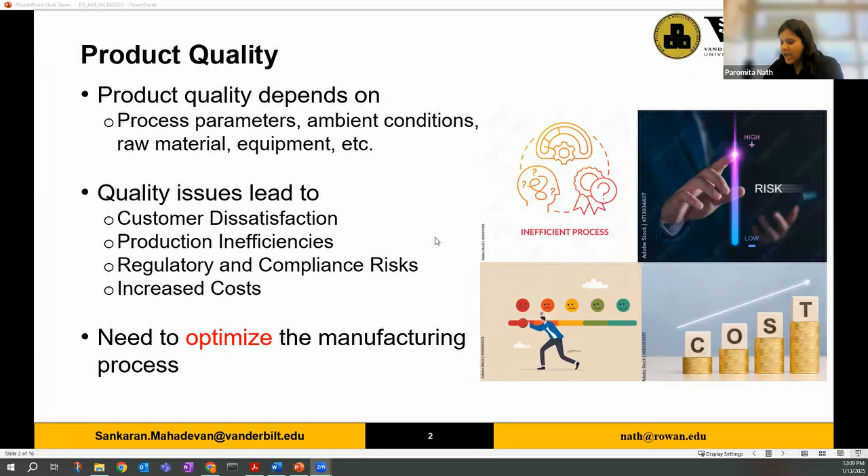Now, how do we do that? If we want to have a product of consistent quality, how do we do that? We have to optimize the manufacturing process.

Now, over the years, this optimization technique has changed. Initially, people would do a design of experiments and then conduct physical experiments, which was basically a trial and error process - let me try these manufacturing parameters, does it help, and does it improve my product quality? As you would imagine, if you're doing this repeated manufacturing physically, you're going to waste a lot of raw materials and energy.

So then there was a shift towards model-based engineering. In model-based engineering, people now create a physics-based model approach. And with that, instead of doing the trial and error in a lab or in a manufacturing process physically, you are doing that with the physics-based models.

Now, no model is perfect. There are a lot of assumptions, and then there are simplifications when we are trying to solve those partial differential equations. So these may be inaccurate, and there tends to be a lot of inaccuracy related to that.

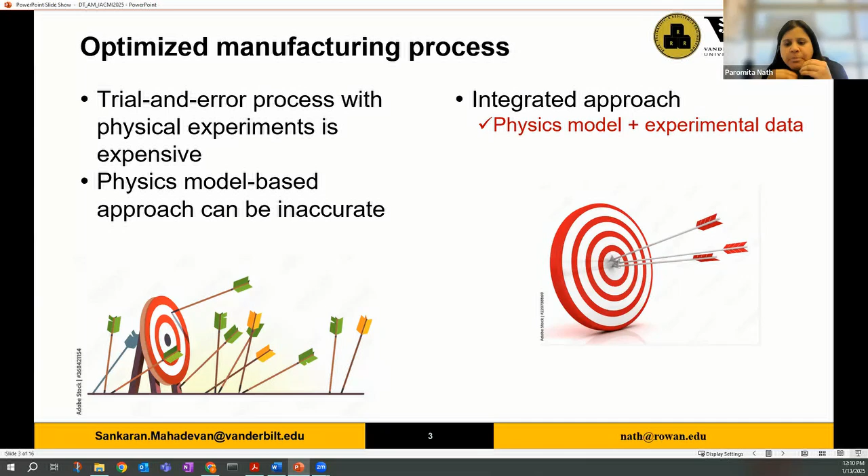So then there was a lot of work on this integrated approach of using physical models in conjunction with a few experimental data. The idea being the physics model's prediction can now be corrected by using some experimental data. And now we can use this corrected physics model to optimize the manufacturing process, which leads to a more efficient overall approach.

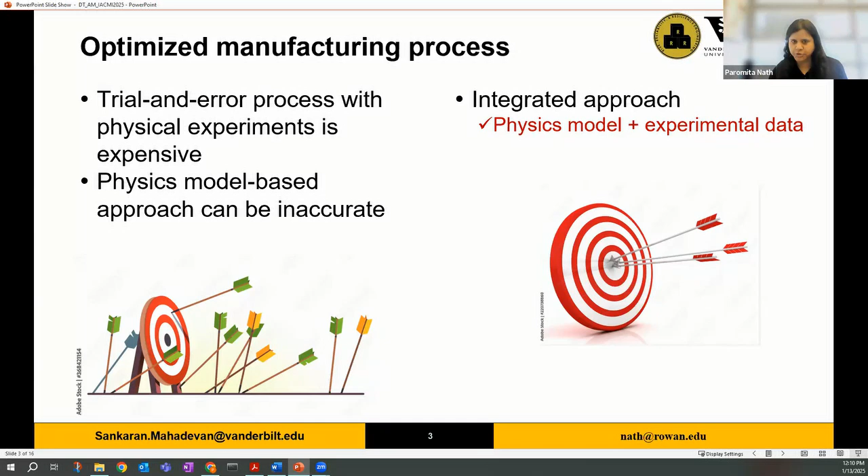Now, what happens when we have a manufacturing process? There is a lot of variability which is inherent to the system. Let's say you get some powder as the raw material for an additive manufacturing process. The powder quality is not going to be consistent. It varies across different manufacturers. It might also be different for the same manufacturer. We need to be able to take that into account. Otherwise, we will end up with products which have variable quality.

Now, we talked about the model-based approach. The moment we add a model into the mix of our optimization process, we are adding more sources of uncertainty. And these sources of uncertainty are different from the ones we have because of inherent variability. This is coming from our lack of knowledge about the model in general, and these are called epistemic uncertainty. That could come from differences in the model parameters - we may not know the exact value, we may not have the exactly correct model itself, there may be uncertainty in the input to the models and so on.

Some people think, well, models have so many issues, I'll just go with experiments, but that also does not work very well. There are errors in the experiment due to human error, there could be equipment error and so on. So basically, we cannot get rid of these uncertainties. What we do have to do, though, is identify these uncertainties, reduce them, and so on.

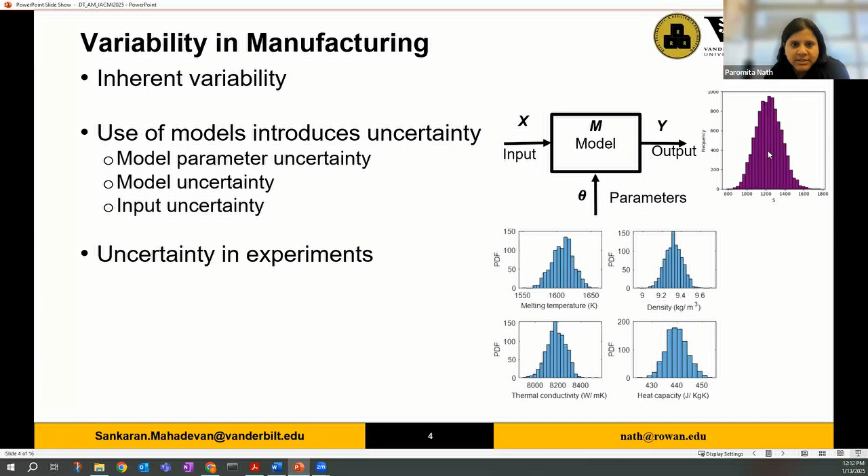So if we look at a model as such, it has some input, it has some parameters. Now, if there is uncertainty in the input and the parameters, your output is going to be uncertain. Now, if the output is going to be uncertain, we need to now account for this variability and uncertainty. So there are two things that we do.

One is the forward propagation, where we first identify where this uncertainty is even coming from, which parameters are leading to more uncertainty. So we do sensitivity analysis and stuff like that. And then we focus on reducing the uncertainty.

Can I collect some more data and reduce the uncertainty in my model prediction? Can I characterize this using better experiments? Can I calibrate and validate my models?

Now, you can do so far with the quantification and reduction of uncertainty, and then we are left with some uncertainty that needs to be managed, and that is where process optimization and process control under uncertainty comes into the picture. Now, when we do process optimization, I would like you to understand the differences between process optimization and process control. In process optimization, we use the information about the manufacturing process before the process has started.

So we take the information that we have earlier and we do the process optimization. Our objective function for this optimization formulation is going to be, we want to have the best quality, we want to minimize cost, we want to minimize time, and so on. But this information is based on things that have been happening before our manufacturing started.

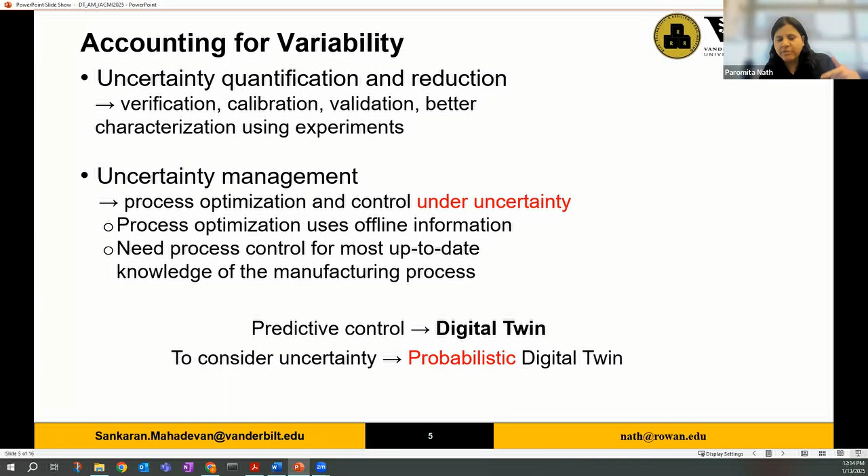So our work is on probabilistic digital twin, which means there is a flavor of uncertainty quantification and management on the digital twin itself. Now, what is a digital twin? There have been many, many definitions of digital twin, and this paper by VanderHorn and Mahadevan does look at all the different definitions. Now, the idea of digital twin was started by Michael Grieves, and that was way back.

And his idea came from life cycle product management. And the definition that is a robust definition for digital twin is that it is for a single instance of the physical system. The data collected from this single instance is used to update the virtual representation. And over time, the digital twin represents this single instance with increasing fidelity.

Now, this is an important thing to note because in the literature and even in the industry, digital twin is very often confused with simulation model. And there is a recent article by Grieves himself saying don't confuse digital twins and simulations.

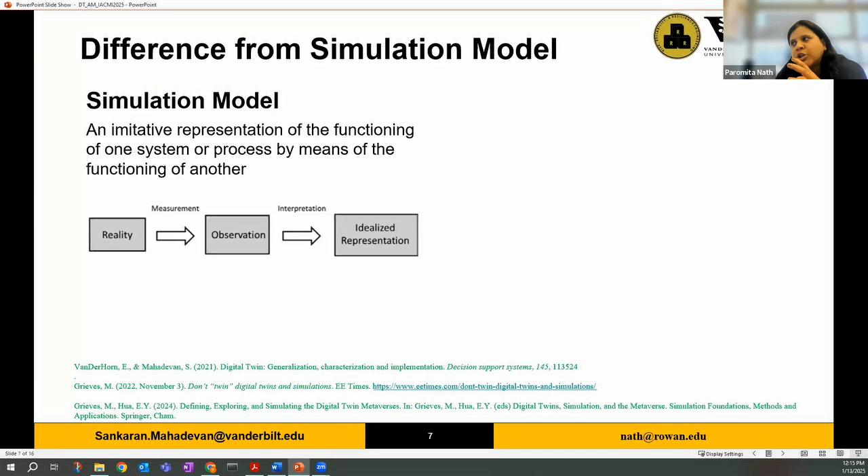The simulation model is basically a representation, an imitation of the physical system itself. However, a digital twin has more elements to it that we would look at in the later slides. So the digital twin is a virtual representation of the physical system. However, this virtual representation is updated throughout the process by this exchange of information between the physical and the virtual representation.

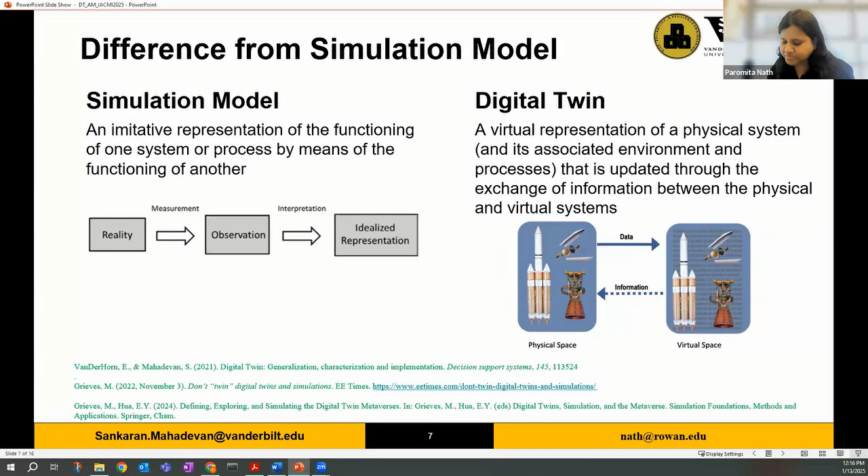Now, if we look at the elements of the digital twin, there are three basic elements, and there is a lot of nomenclature related to that. This is the nomenclature that I'm going to use for the rest of our presentation.

So a digital twin has the physical system that you're making a twin of. So this is the actual or the intended physical element, and this resides in the physical world. So this could be your CNC machine and the whole setup related to that. When you make a physics-based model or an analytical model of this physical system, that is the virtual representation of the digital world.

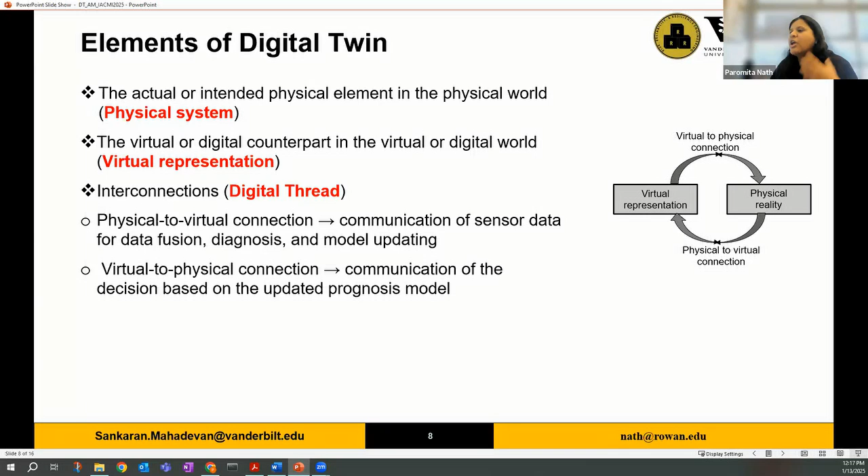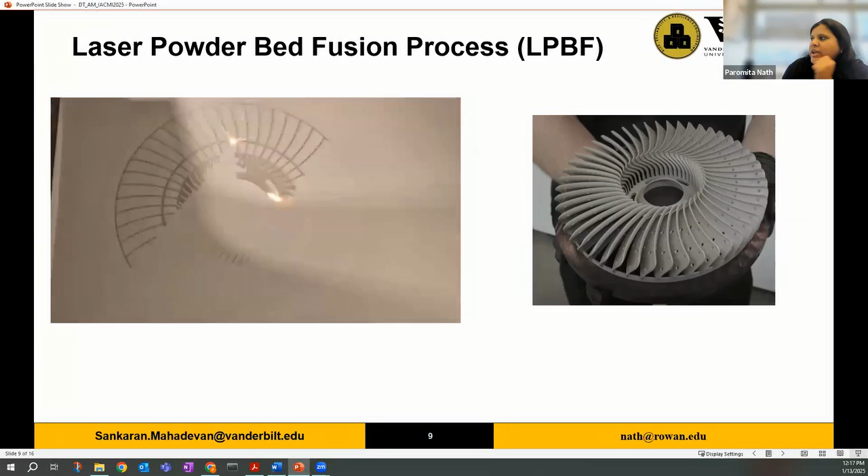Now, if you look at a laser powder bed fusion process, which is here, this laser goes over the powder material layer upon layer till we get this final product. Now, if we have this product, how would we make a digital twin for this LPBF system?

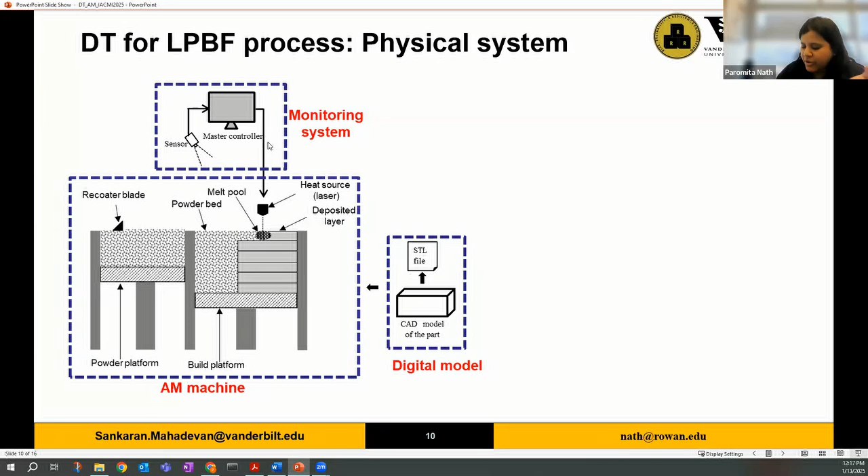We'll start with this, with this physical system, which consists of the machine itself. In 3D printing, we need a digital model, which is a CAD model that goes on. We have a monitoring system as well. For a digital twin, the monitoring system has to be online, non-destructive, and non-contact. So those are the requirements. Then we have the digital twin's virtual representation, which is basically the physics-based models.

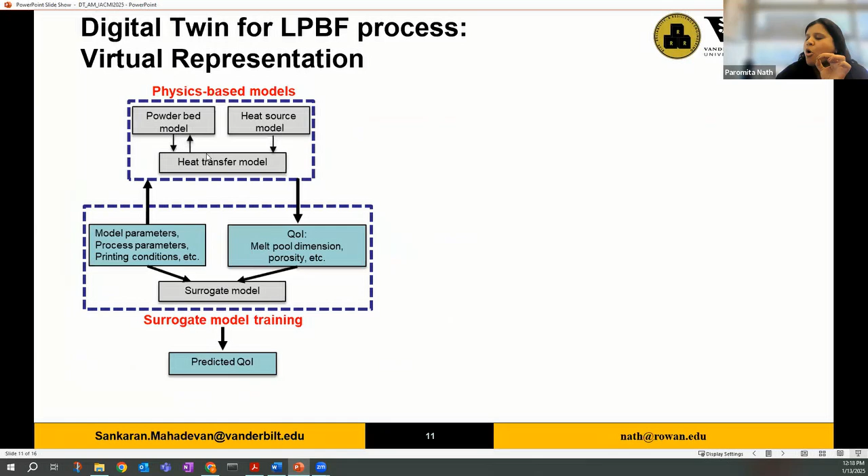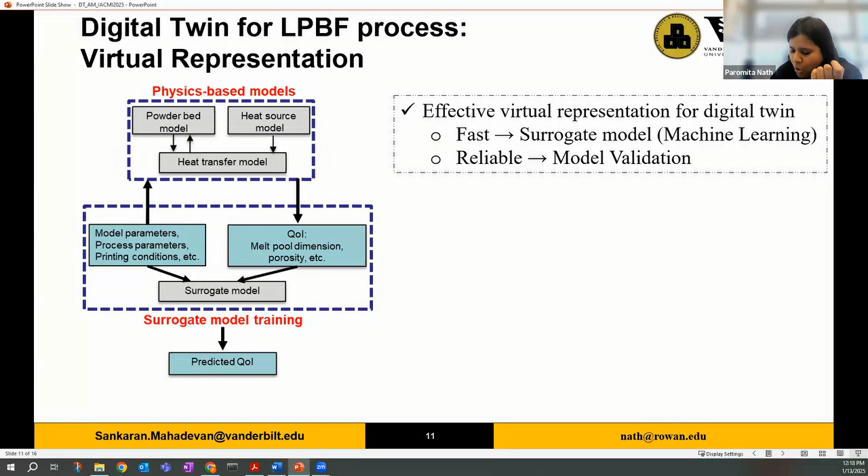Now, the physics-based models sometimes take days to run. So to make it more fast, we have to have a surrogate model. Most of the time, these are machine learning-based models. Then we also want to have a reliable model.

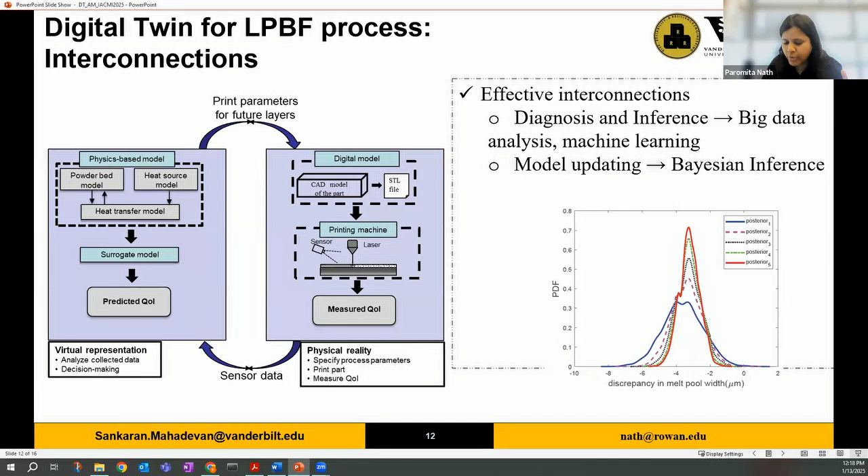Now let's say we want to do decision-making and process control with respect to porosity in 3D printed parts. The idea here is that we use the digital twin to predict what is going to be the quality of the finished part.

If the quality of the finished part is very similar to our target, we then continue the process as it is. If it is very, very poor, then we know that nothing we do is going to change much about this product, and the target quality is too much higher, then we can terminate the process and save on material.

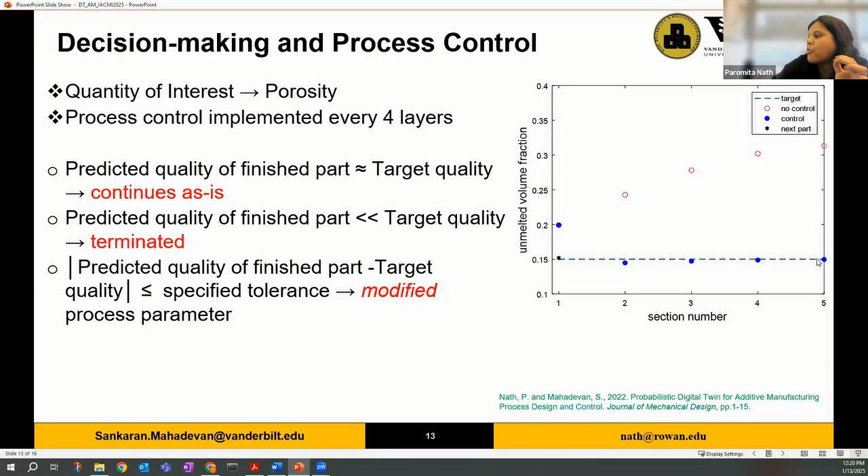So this is an example from one of our works where we see that if we do not control the product quality by changing the process parameters, the porosity tends to keep increasing, leading to a part that is not of good compliance. Whereas if we keep changing the manufacturing process, then our product quality is within the limit or within the target that we had.

So this was all about the LPBF process, which is for additive manufacturing with metal. Now, we have been recently working towards the digital twin for composites in the additive manufacturing system as well, where we have a 3D printer with composites.

Now, what we are doing is we are looking at the process structure property relationship that we would then validate with experiments. Once you have this model set up for a composite, where you know what should be the parameters depending on what is the quantity or what is the volume of your carbon fibers in the material.

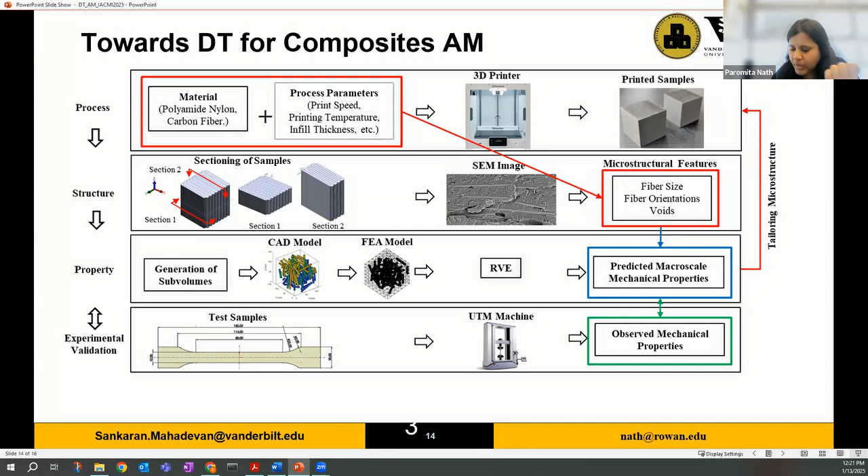How do you then predict the macro scale properties using a simulation model here, for a finite element model, for instance? And then how can we now tailor the microstructure so that we get composites that have the quality of product that we really need? Okay, so this would be, in short, an introduction to how digital twin works.

And I'll bring it back to Dr. Mahadevan for his concluding remarks.

Thank you, Paromita. So as I mentioned in the beginning, we are now taking these concepts that we developed with NIST funding and Paromita's PhD now to NASA STRI project that started last year. This is funded, it's a $15 million project over 5 years.

and certification of additively manufactured metal components. That is actually, as Paromita mentioned in the beginning, because of all the variability, there is tremendous challenge in qualifying and certifying additively manufactured products.

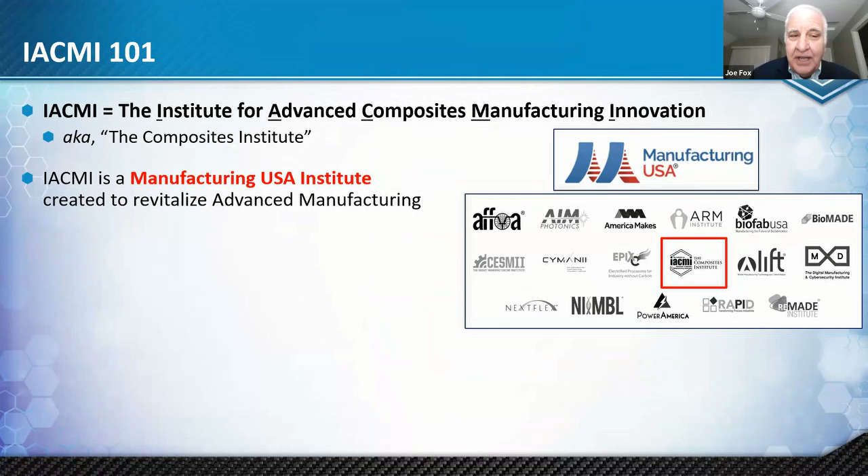I think most of the people in the audience are familiar with IACMI, but there may be a few newcomers, so here's some IACMI 101. IACMI stands for the Institute for Advanced Composites Manufacturing Innovation, also known as the Composites Institute. It is a Manufacturing USA Institute, one of 18 that have been created to revitalize U.S. manufacturing. It is a public-private partnership that brings together industry, academia, and the government.

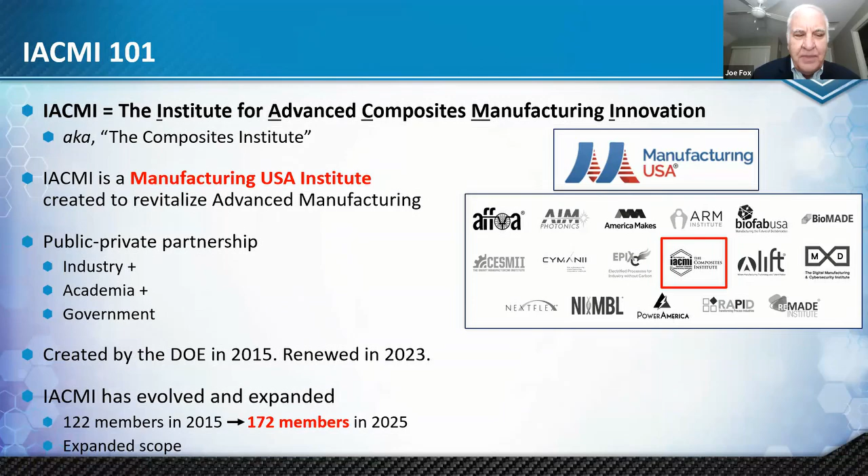It was created in 2015 and then renewed in 2023. The press release in 2015 said that IACMI had 122 members when it was created. That number today is 172 members, so IACMI's membership has increased by 40% in the past decade. Its scope has also expanded, and I'll talk more about that as I proceed through my talk.

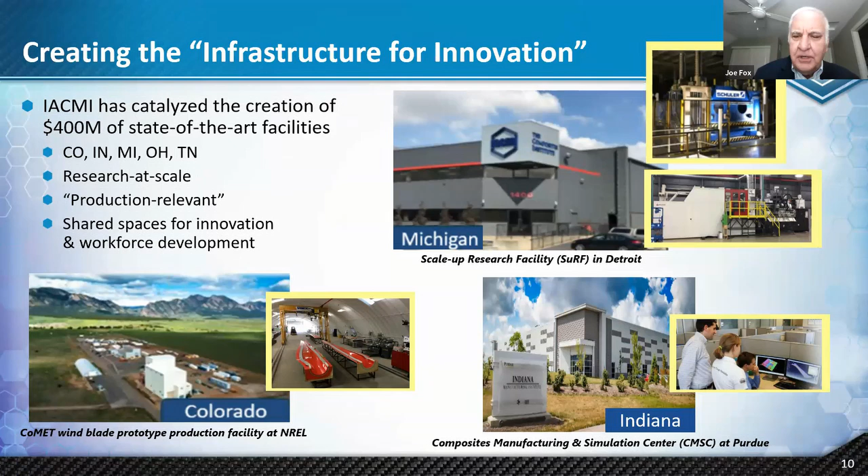IACMI has catalyzed the completion of more than 60 R&D projects with a research portfolio valued at more than $150 million. Those projects have involved more than 90 IACMI members, and there are currently 5 R&D projects underway. These projects have been industry-led, and as Dale and former CEO John Hopkins would like to say, purpose-driven. Those are 2 very important attributes of IACMI projects.

They have addressed key techno-economic challenges to the increased adoption of composites, and they have delivered supply chain-based solutions. You can find the project reports, the final reports for these projects, on the IACMI website. These projects have resulted in dozens of publications and articles.

Now I want to tell you about 4 technical innovation success stories: for additive manufacturing, for the production of composite parts for vehicles, for the manufacturing of wind turbine blades, and for the recycling and reuse of composites. Success story number 1 has to do with additive manufacturing of composites and tooling.

This is a great success story involving innovation and collaboration at Oak Ridge and Purdue that spans nearly the entire decade. It began with a project at Oak Ridge that used the Big Area Additive Manufacturing Equipment, or BAAM, at the manufacturing demonstration facility at Oak Ridge. That equipment enables the production of very large 3D printed structures, like this car that Chad Duty is sitting in.

About 10 years ago, Professor Byron Pipes and his graduate student, Eduardo Barocio, saw what was happening at Oak Ridge, and they said, this is the future. So they began a project to model the additive manufacturing process, and they acquired their own large-scale additive manufacturing equipment to validate their models.

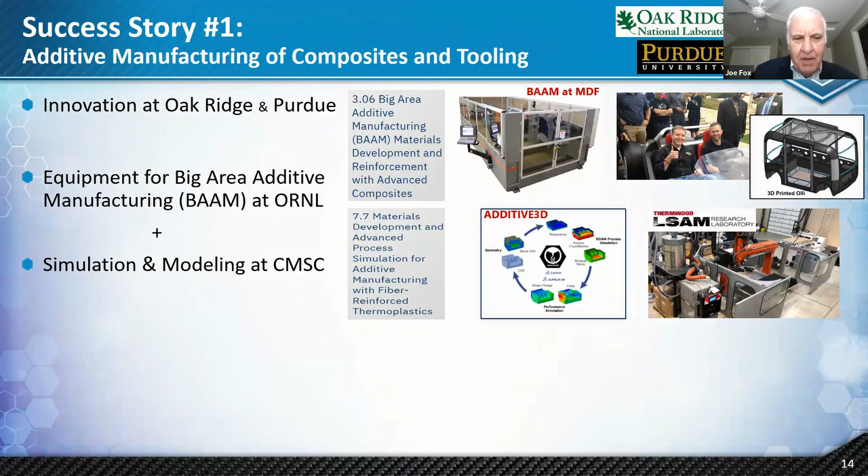Fast forward to 2022, when Dimensional Innovations worked with a team of IACMI members to create the world's largest 3D printed structure: the Al Davis Memorial Torch at Allegiant Stadium in Las Vegas. The team consisted of Techmer, a material supplier, Thermwood, an equipment supplier, and Purdue, which helped with the structural engineering analysis. This is a very good example of a supply chain-based solution, and IACMI catalyzed this collaboration.

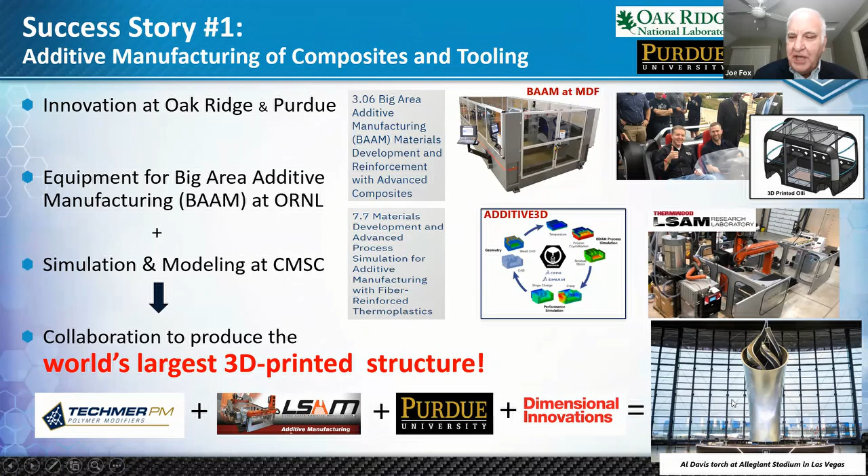You can see the fruits of that collaboration the next time you watch a Las Vegas Raiders football game on TV. Let's talk a little bit more about what is happening at Purdue. I said that they are the IACMI Center for Simulation and Modeling, and they are having a very big impact in the tooling industry because they are enabling and revolutionizing the 3D printing of tooling for advanced composites.

They've done that by developing ADDITIVE3D software, which, like the Vandy folks have talked about, is the digital twin or virtual twin of the additive manufacturing process. They developed that in conjunction with Dassault Systèmes.

Their approach is summarized here, where they have taken the large-scale additive manufacturing equipment plus the virtual twin to give tooling that is printed right the first time. That means shorter production times for tooling, fewer tooling iterations, and that translates into lower overall tooling costs. This approach is being adopted by members of the Composites Additive Manufacturing and Simulation, or CAMS consortium at Purdue.

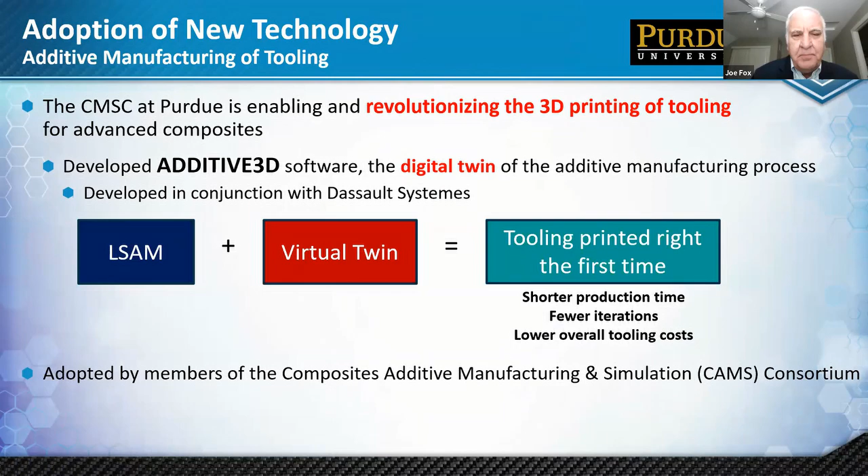And it is another very good example of where adoption of new technology, state-of-the-art technology developed by IACMI is having an impact. The second success story has to do with the production of composite parts for vehicles.

This is an area where automotive OEMs like Ford and Volkswagen have leveraged IACMI's resources and expertise. They have used the equipment, tooling, and fabrication expertise at the SuRF facility in Detroit, and the modeling and simulation expertise at Purdue. It's also another area where supply chain-based solutions have been created.

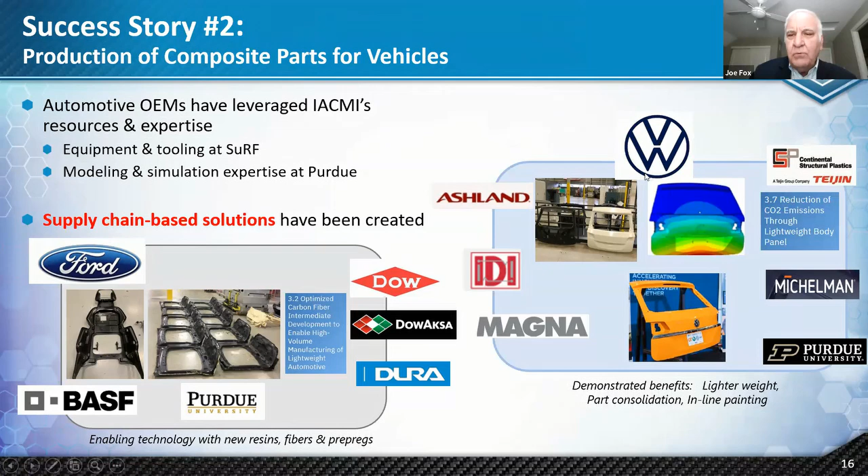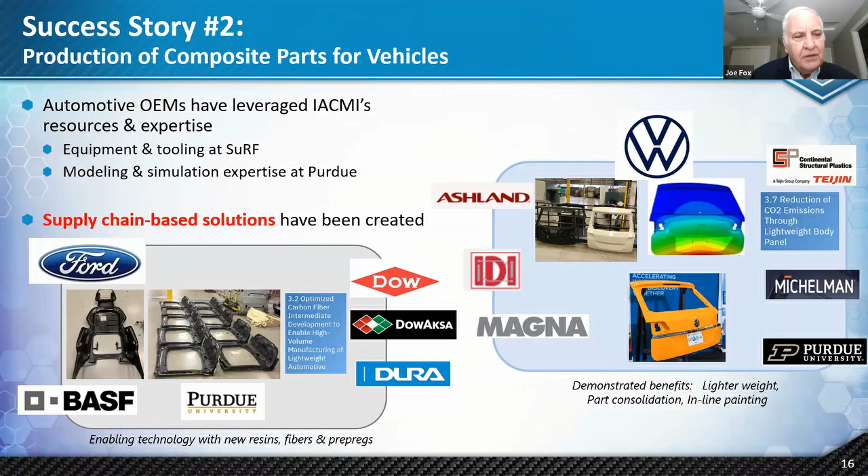For example, here you have Ford working with a host of material suppliers to demonstrate enabling technology with new resins, carbon fibers, and prepregs. And over here, you have Volkswagen, again working with an assortment of material suppliers to demonstrate the lighter weight, part consolidation, and inline painting benefits of composite parts like lift gates and hoods.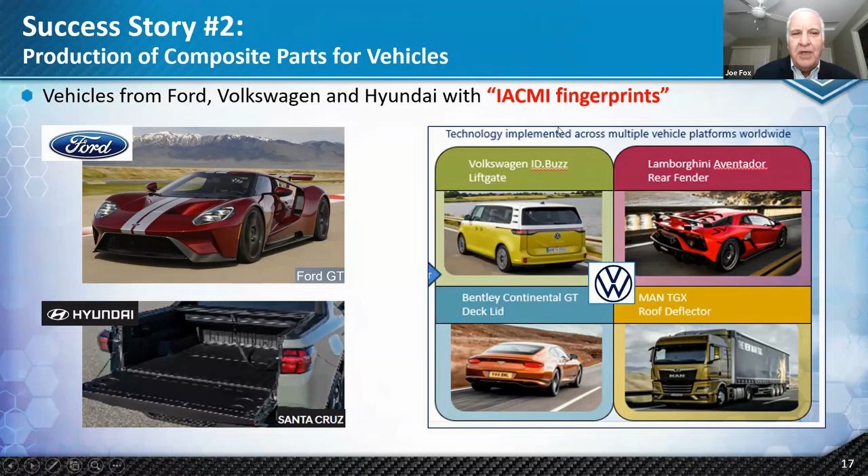The third success story has to do with the manufacturing of wind turbine blades. This is a very good example where IACMI efforts have led to steady and ongoing advancement of the technology readiness level, or TRL, of a technology.

The technology here is the production of next generation wind turbine blades, demonstrated with Arkema's Elium resin, a thermoplastic resin that processes like a thermoset. Commercial blades with Elium have not been produced yet, but this timeline shows the steady increase in TRL that has occurred, because in 2016, this 9-meter blade was produced at the CoMET facility at NREL.

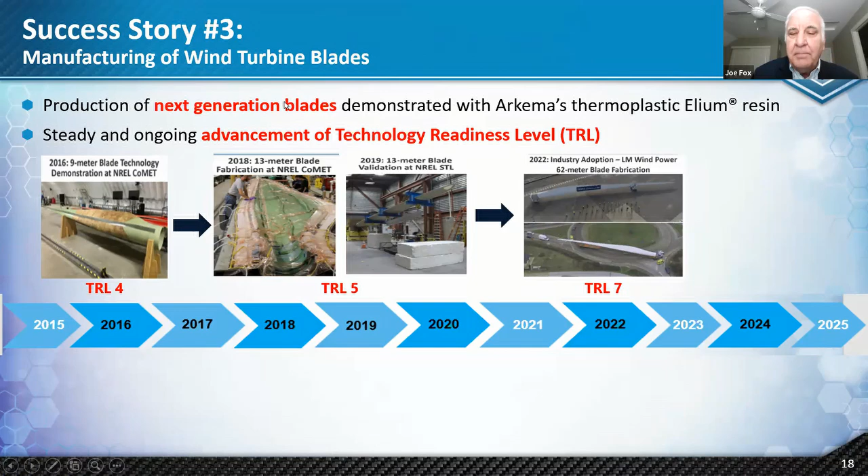That's TRL 4. In 2018 and 2019, a 13-meter blade was fabricated, tested, and validated at NREL, taking the TRL up to 5. And in 2022, Arkema, LM Wind, and members of the Zebra Consortium in Europe demonstrated this 62-meter blade, taking blade fabrication with Elium up to TRL 7.

IACMI has also improved the production of existing blades through the use of RFID tags, inline quality monitoring, and advancements in automated finishing.

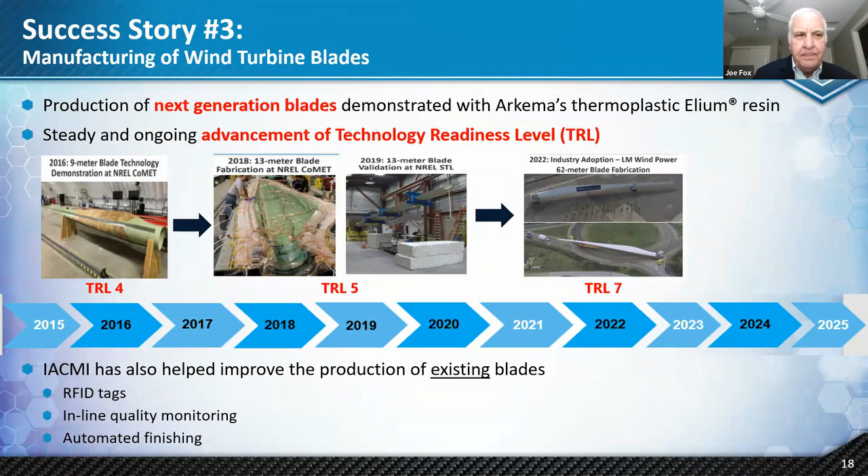Success story number 4 has to do with the recycling and reuse of composites. This is an area where IACMI has really taken a leadership role over the past decade, because they have catalyzed an enormous amount of activity in this area.

There have been 13 projects, including these 2, involving more than 30 IACMI members, and a recycling and circular economy working group has been formed. IACMI efforts have demonstrated the recycling of both carbon fiber and glass fiber composites.

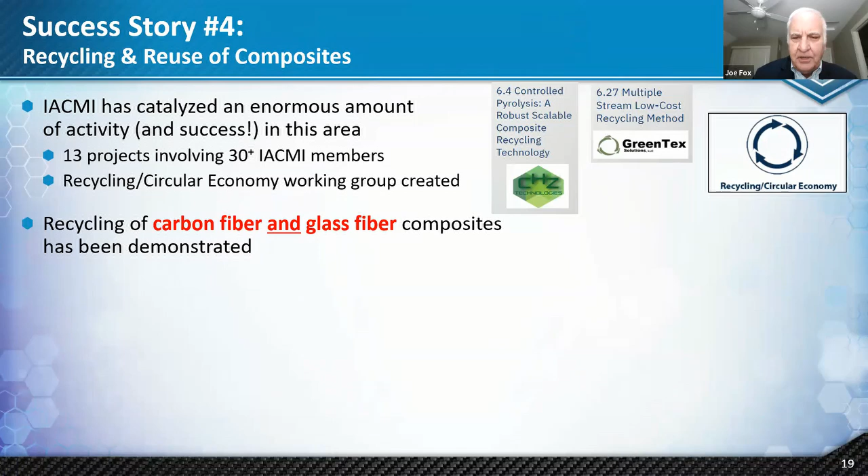For carbon fibers, I want to highlight Vartega and the Composite Recycling Technology Center. Recycled fibers from Vartega have been used to produce parts like this thermoplastic fender, and the CRTC has used recycled carbon fibers to produce these benches and other structures.

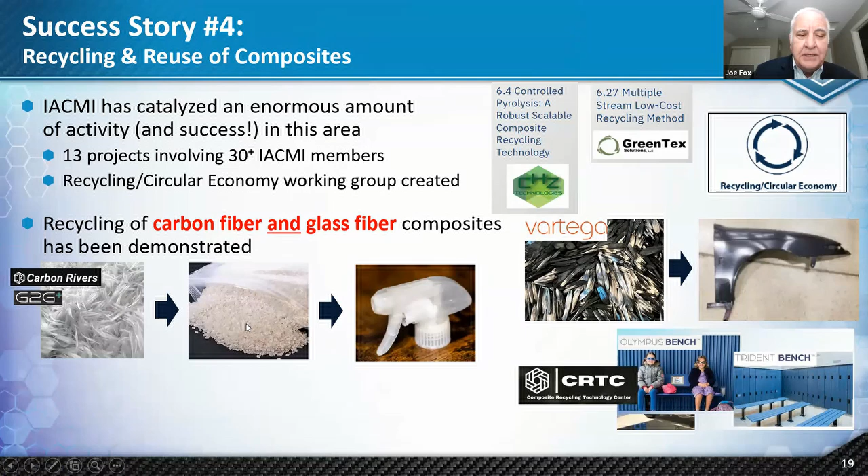On the glass front, Carbon Rivers has developed a process for producing recycled glass fibers that can be pelletized with thermoplastics to produce parts like this spray nozzle.

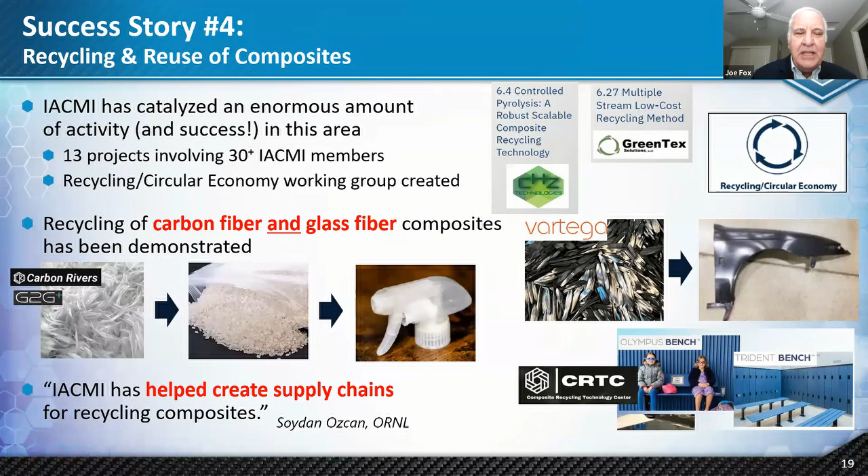I mentioned supply chain-based solutions, and here's another quote that I really like. IACMI has helped create supply chains for recycling composites. And it's important to note that those supply chains did not exist before IACMI. It's almost like they've created an ecosystem within an ecosystem.

Let's talk a little bit about commercialization success stories. I mentioned the vehicles with IACMI fingerprints, but IACMI has also catalyzed the commercialization of more than 24 new and innovative products from upstream members.

For example, I mentioned Vartega on the last slide. They have commercialized their Easy Feed Bundle product line, which consists of recycled carbon fibers and thermoplastics that can be used in processes like injection molding.

Michelman has commercialized a family of sizings for use with carbon fibers known as Hydrosize Carbon. Sizings are the coatings that go onto fibers to make them more compatible with resins. And these hydrosized sizings are finding applications in numerous industries.

A few more examples. When I was talking about the Al Davis torch, I mentioned Techmer. They have commercialized a family of thermoplastics customized for 3D printing, known as HiFill. Staying on the additive manufacturing front, Purdue has made their additive 3D software available for licensing in a whole host of additive manufacturing applications.

And going back to vehicles, IDI has commercialized Class A SMC for automotive applications like the Hyundai Santa Cruz, but because of the improvements in surface quality they demonstrated at SURF, they have also sold their Fortium SMC for non-automotive applications.

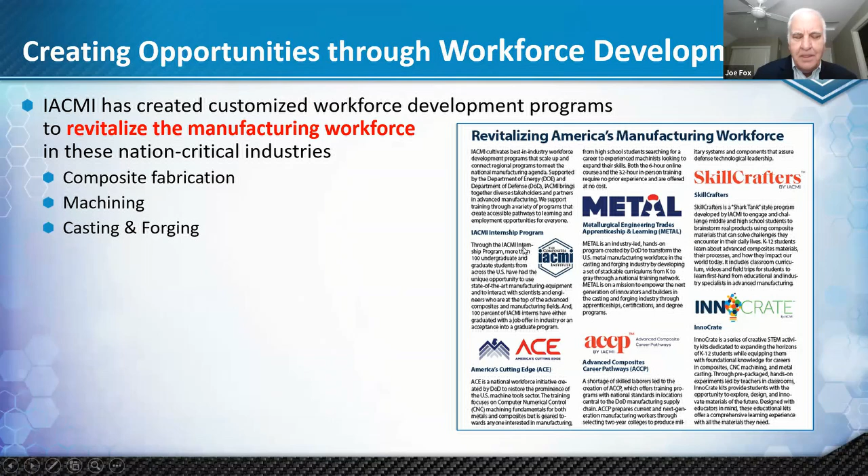As this one-pager shows, there are a host of programs: the IACMI Internship Program, ACE, Metal, ACCP, SkillCrafters, and InnoCrate. No shortage of acronyms. These customized programs have motivated students of all ages, from K to gray, to consider a career in manufacturing, preparing them for both blue-collar and white-collar jobs, now and in the future. If you sum up all the people involved in these programs to date, the total comes to greater than 18,000, and it is growing all the time.

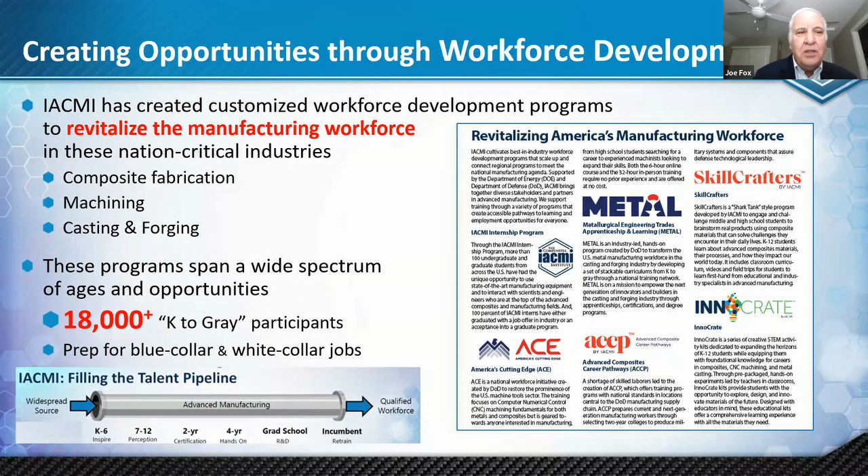I want to highlight just a couple of those programs, starting with the internship program, a real success story of IACMI 1.0, having created more than 100 industrial internships for college students spread throughout its ecosystem. Importantly, these students have a 100% placement rate, hired into industry, academia, or the federal labs, or accepted into graduate school. Many were quickly hired by the companies they interned with. I'm pleased to announce internships are a very important and attractive element of IACMI 2.0, and students are being connected to opportunities in the coming year as I speak.

These interns are not the only students who have been impacted by IACMI. Many other graduate and undergraduate students have received advanced training in fabrication of composites and in simulation and modeling.

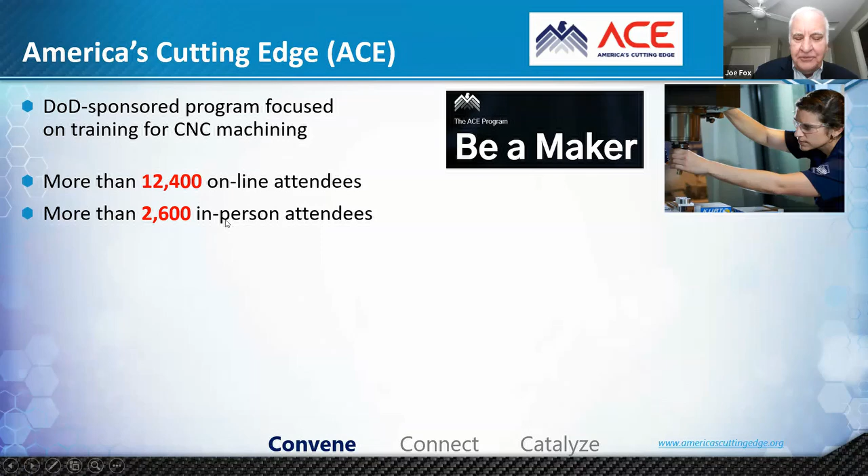Let's talk about ACE. ACE stands for America's Cutting Edge, a DoD-sponsored program focused on training for CNC machining, an industry very important to our nation's military. This is definitely an area where IACMI has convened, with more than 12,400 online attendees for ACE training and more than 2,600 in-person attendees. Over 40 machine tool training centers are involved in this program, and as this bar chart shows, ACE continues to grow and grow.

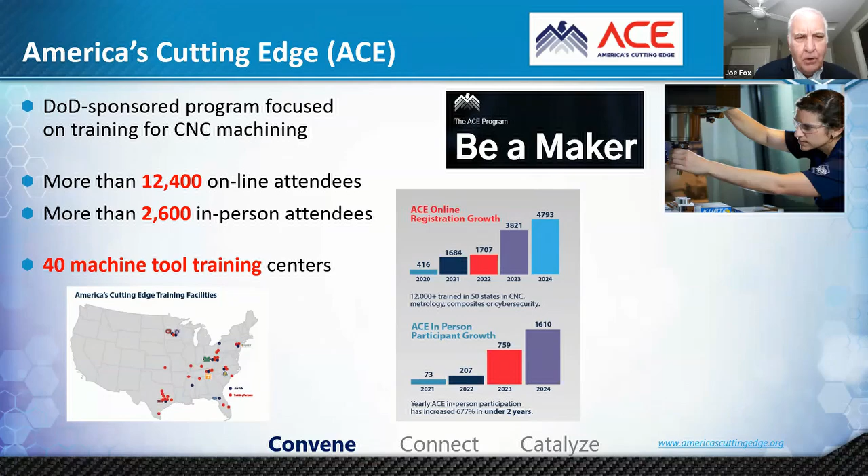Let's talk about community college involvement in IACMI, because dozens of community colleges have become involved in its workforce development initiatives. This is an area where IACMI has definitely connected, linking community colleges to universities through innovative franchising and hub-and-spoke models, and connecting students to local and regional employment opportunities. It also shows how IACMI has evolved and expanded. When IACMI was formed, it involved just a handful of strong universities, but today there are many, many more community colleges and universities involved through its workforce development initiatives—almost another example of an ecosystem within an ecosystem.

IACMI has also catalyzed the creation of new jobs at existing companies. Most people think of TPI as a wind blade manufacturer, but their exposure and involvement with high-pressure resin transfer molding at the SuRF facility in Detroit spurred them to increase production of parts for automotive applications. They have created more than 24 new engineering and manufacturing jobs in their automotive division, now known as Senvius. We'll talk about company attraction.

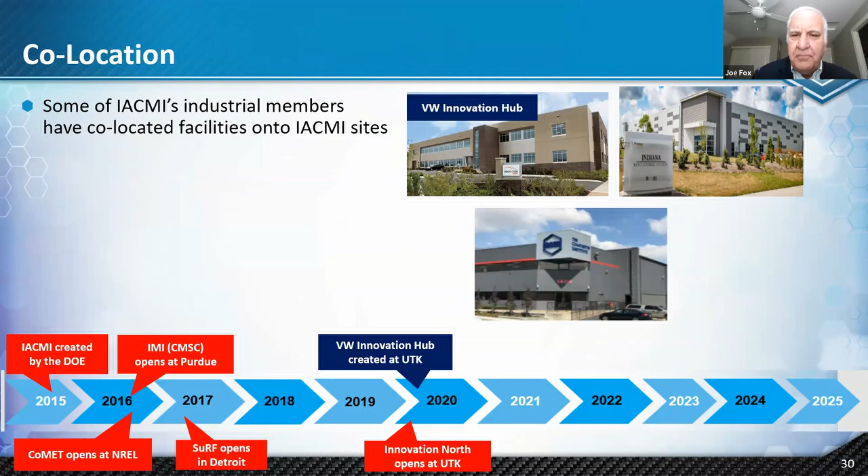I want to finish up this section by talking about co-location, and say that some of IACMI's industrial members have co-located facilities onto IACMI sites. You've already seen these pictures and this timeline, but I want to add a few events to illustrate co-location. In 2020, Volkswagen co-located its North American Innovation Hub on the campus of the University of Tennessee. That same year, Dassault Systèmes co-located its 3DEXPERIENCE Center on the campus of Purdue. And in 2021, BASF co-located their North American additive manufacturing facilities at the SuRF facility in Detroit.

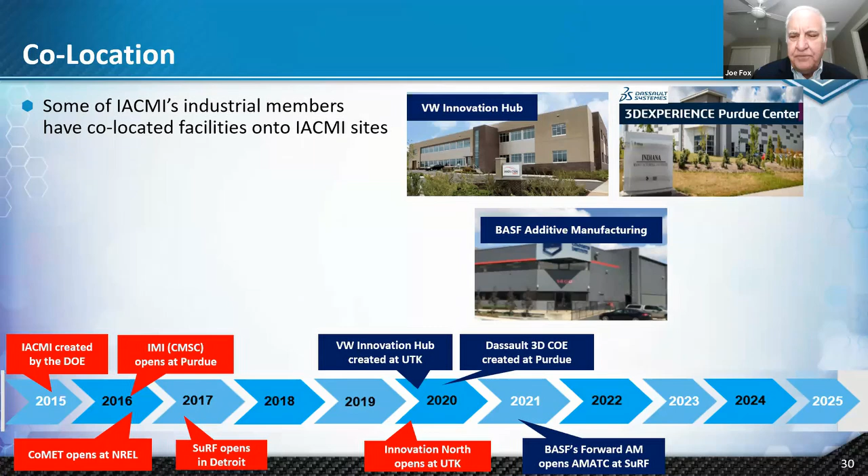There are many benefits to this co-location. It's really a combination of job creation and workforce development. It also fosters collaboration between industry and academia, which is a very good thing. And I'm happy to report that there's going to be more opportunities for co-location at Innovation South as it opens on the University of Tennessee campus. And again, Dale mentioned the open house on February the 19th.

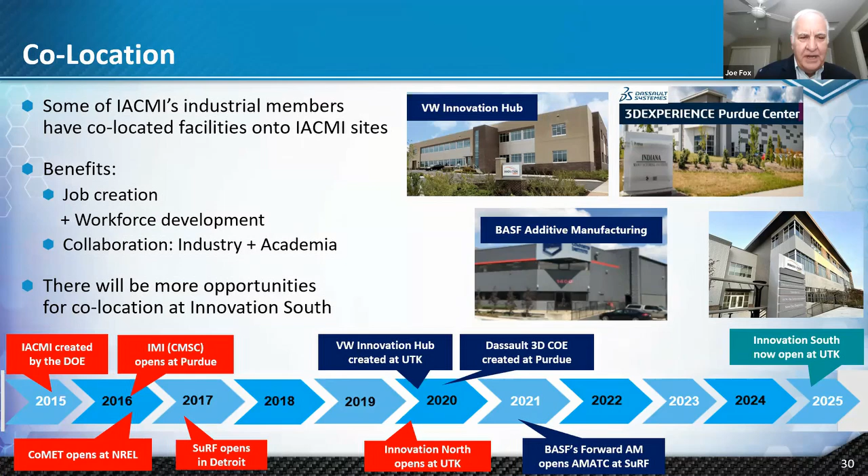So we've talked about technical innovation, workforce development, and job creation. Let's talk about the other 2 buckets, and let's talk about collaborations.

All right, so how has IACMI catalyzed this collaboration? Well, not too surprisingly, by convening and connecting. They have convened annual members meetings, which feature technology updates, market updates, and snapshots of innovative SMEs. Since 2015, these meetings have attracted more than 4,500 people, and they represent excellent networking opportunities.

IACMI has also convened working group meetings of their 5 working groups. These are more frequent, and they have been virtual, especially during the pandemic, and in person. They identify key issues and challenges, and they create ideas for new projects. I have been fortunate to be the co-facilitator of the Infrastructure and Construction Working Group.